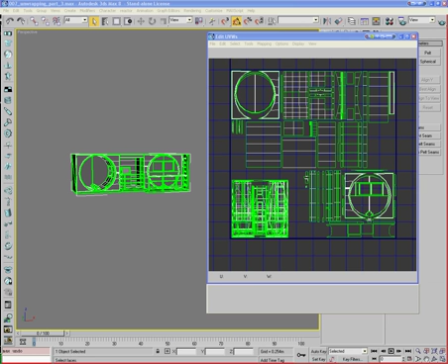Okay, so with luck we're actually on the final straight now, which will be cool. So what we're going to go do now is this ladder, or the ladder area anyway. There's still a couple of rivets on that, so they'll be taking up a bit of unwrapped space, I suspect. So I'm just going to click here and get all these front pieces.

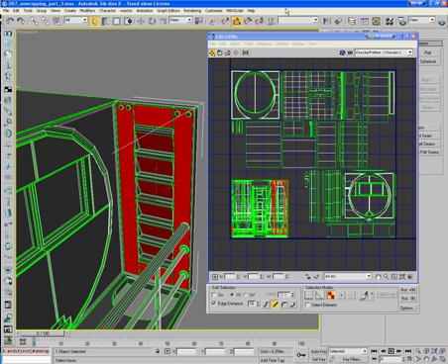There we go. Now move this off and just grow this out. There we go. Now you can see it's all down here, yeah? If I just use the move tool, we've got these pieces and this piece. So these must be the steps here.

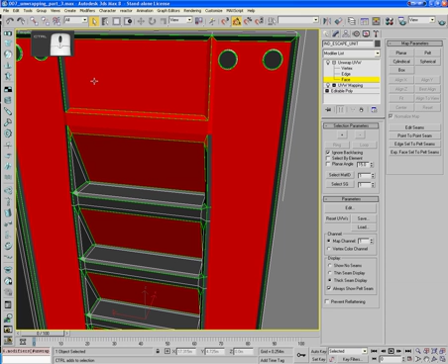So I'm just going to reduce this just a tiny bit. In fact, there we are. Take those off. I'm going to manually add in these parts, because these are the important bits.

I do apologise for me sniffing, making gawking noises and stuff. A bit of a cold at the moment, I think.

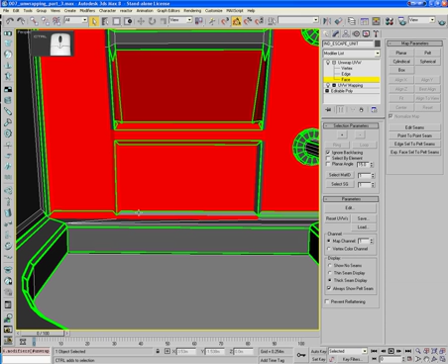Oops. Okay. Just undo those bits. And then get these ones in.

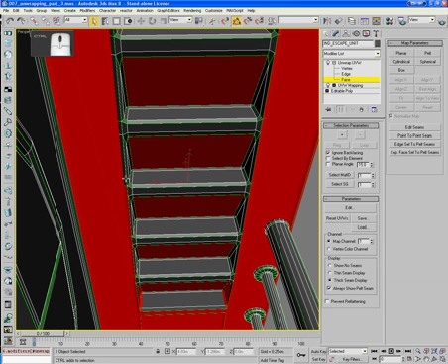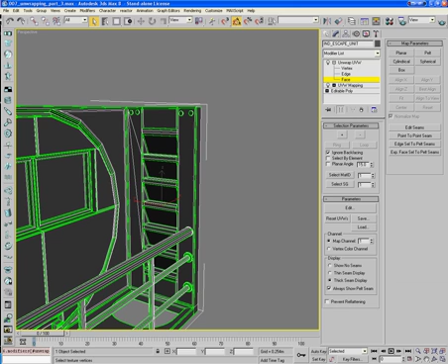Okay, pull back. Now you can see these pieces over here, so I'm going to go Tools, Detach Edge Verts. I'm going to bring this over to here. Now let's have a look at this piece here and see what it is.

Okay, these pieces aren't important, so I'm going to bring these back to the little fold. These bits are very important, my mistake. Let's have a look at them. Spread them out a bit. See what we've got.

Right. These are our steps that go inside it. All just been stacked one on top of the other. And then this is just a side piece that isn't actually that important by comparison.

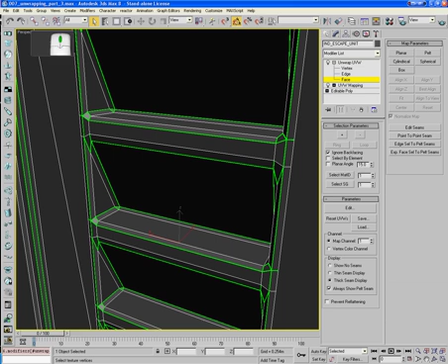Oops, sorry, I do apologise, I'm in a different screen here. These are all stacked on top of each other, yeah, like this. And basically what I've done is I've just pulled them out like that. My apologies for not realising. Pull that over to there. And that.

I'll zoom in a bit so I can actually select it. Getting to the part where we're kind of moving just the fiddly little twiddly bits around there. Oopsie daisy.

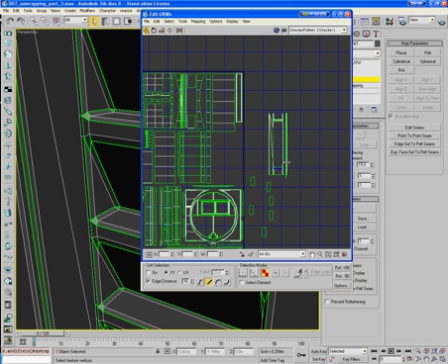Move this out of the way. Back into there. Right, so I'm going to place each of these steps inside this piece here. That should be the top. There we are. Pull back a bit.

So let's find out. This is a one for there. That one goes underneath it. That one goes above it. That one goes above that one. That one goes above that one, and this one goes at the bottom.

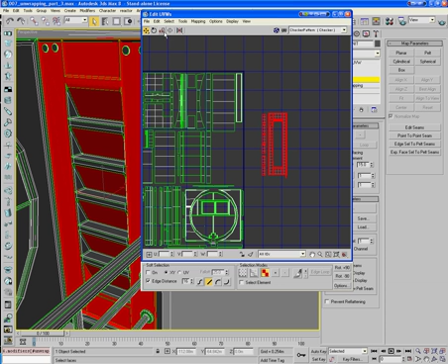Okay, turn these over, and I'm going to reduce them in height and everything else just a tiny bit, and then move them into place. There we are.

Now, this piece here, and here is important for various reasons. So if I go over here and do a tools, detach edge verts, and that will, oh look how nicely that fits just there. There we go.

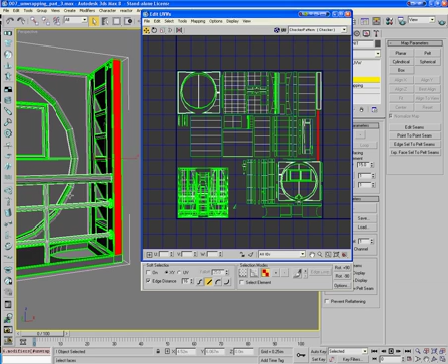Now what else can we do? We've got all these lovely little pipes here. There's not really much I want to do with those, because as I said, I'm going to detach those and do those procedurally anyway.

Quick look around. This side piece can probably do with a little bit more love, to be honest, so I'm just going to move this in here and trying to reduce these a little bit more. Bring that over to there, just so it's nicely tucked out of the way.

I'm going to grab these pieces. Tools, detach, grab, expand a bit. Okay, that's one of the side walls in place.

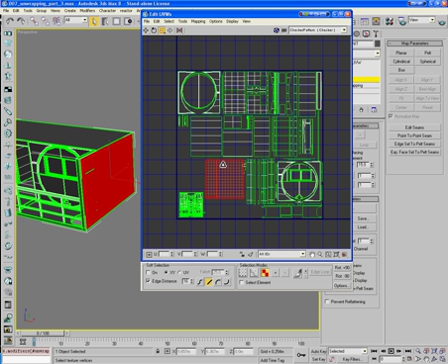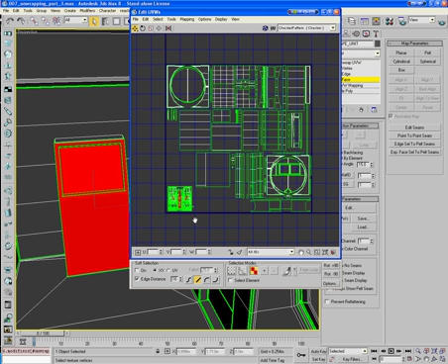Right, now we're left with our little terminal here. So I'm going to take the screen and grow. Take this as well. And I'm pretty sure, yep, there it is. Tools, detach edge verts.

There is our terminal. Not looking as wide as it should be though, so we can fix that. There we go, that's the correct width. It smells fabric conditioner for some reason.

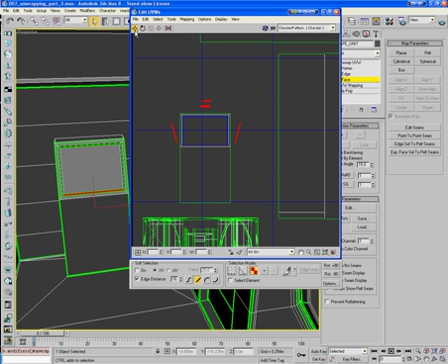I'm going to move these little pieces here down because they mattereth not a fig. There we go. That goes there.

Now, over here, take this piece and this piece, and for double cunningness points, I'm going to take this piece and this piece. Note that I'm holding control. You should have worked that out by now though, so there we go. Grow these out just a bit. There we are.

That goes there. Only got two real main pieces left to go now. And admittedly this has been a very fast unwrap session. You should take your time and you'll do a much nicer job than I do, believe me.

Okay, tools, mapping tools, here we are. Detach edge verts, it's at the top of it.

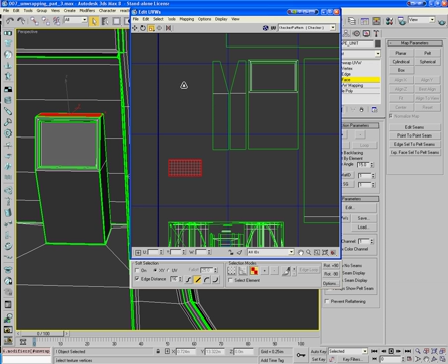Bloody riverdance going around my head for some reason. Sodding Michael sodding Flatley. Oh no, I can move my feet really fast. Look at that, look at it all flail about. Yes, well done Michael, I'm very impressed.

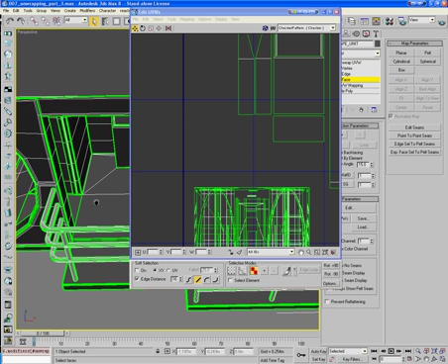Okay, and I think I'm just going to move this over here so I can... where's it? There we go. Move that up to there. I'll click here, here, getting a bit closer. There, I think I've got the other side too. And here.

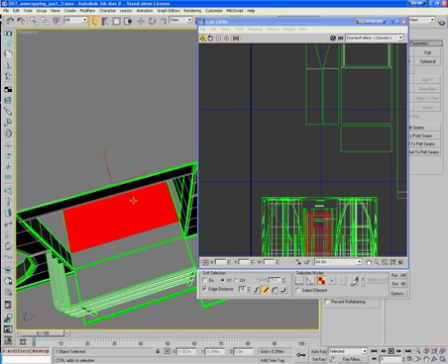And you can see the floor is just there, so tools, detach edge verts, drag it up, there we are. And let's check out our spaces. I think we can fit one in just there, don't we? Yeah, of course we can. Enlarge it a bit more. Don't want them to overlap, that's quite important by the way.

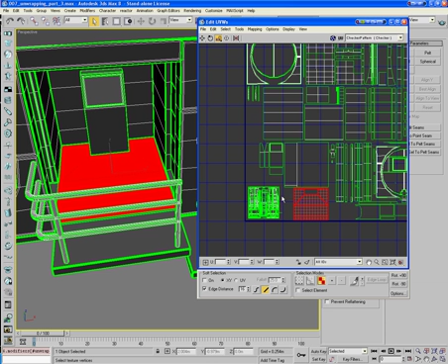There we are. Okay, we now have the plinth. Now, if I just select this part, which is like all the other junk that's left in here, I'm going to select that, turn around, that, and that.

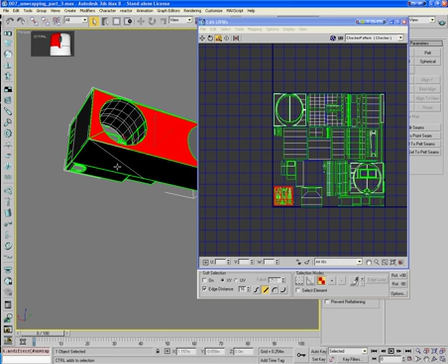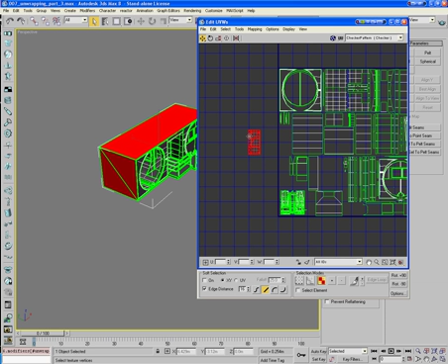Okay, this is our main kind of walls. They're not that important, so just going to detach them and move them somewhere, kind of out the way a bit. Scale them down though, just so that on the off chance we don't stretch any textures with them. Remember, we're not actually seeing this piece, it's behind, it's not important.

Okay, now grab these, this is our leftover nonsense. If we were just to flatten it, and then reduce it in size... oops, a daisy. There we are.

Come down here to where the space is. So I mean, this is all just our leftover bunkum, yeah? The bits that make up the pipes or whatever, and borders and stuff. And you can unwrap these more, you can unwrap them to your heart's content, quite frankly. Just I don't really have time in this tutorial. I've taken quite a long time as it is.

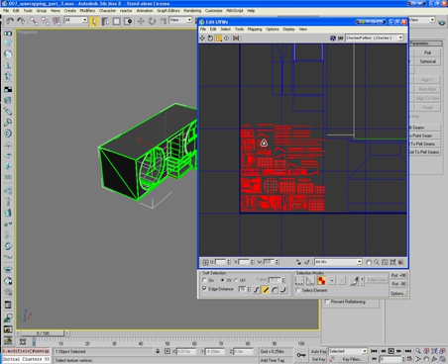Okay. So, open this out now, and I'm going to get this kind of centralised on my screen.

Now, in the good old bad old days of 3ds Max and unwrapping, we had to use Texporter to kind of print out this, or we could use print screen and then take it into Photoshop or MS Paint or GIMP or whatever the hell you're painting in. If you're particularly unlucky, you know, deep paint.

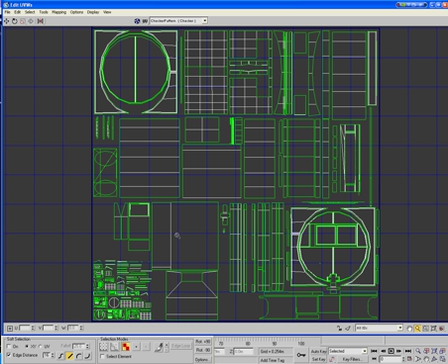We don't have to do that anymore though, because we've got various options. So, let's have a look. Try and remember where the heck it is. Here we are, Tools, the Render UVW template. Fantastically useful, it does what Texporter used to do. So click on it.

And at the minute we're doing 1024 by 1024, which is good. You can do more than that if you want, but try and keep it, you know, paired. So 1024, 1024, or 512, whoops, 512, or whatever. You know, I don't mind. So 1024 by 1024, that's quite a nice big file, and hopefully we should get some detail on this.

If you want to go really mad, then 2048. However, you'll be putting a lot of detail in that one. I think I'll go for 1024. There we go, and if I just click render, here's our rendered map now.

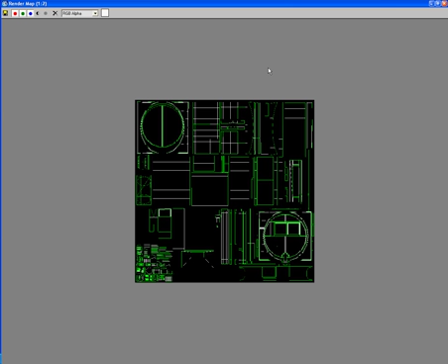Now it looks a bit kind of off, but if you actually zoom in to real size, you can see it's rendered out our UV pretty much perfectly. Now if I click save and save my bitmap now, we're going to have a nice template to work from for dragging it into Photoshop.

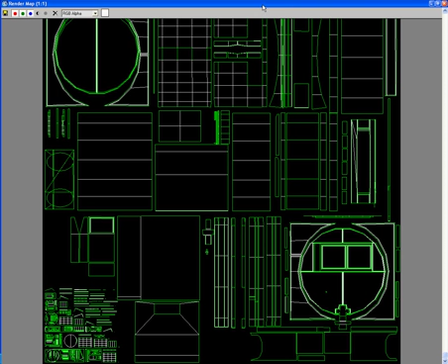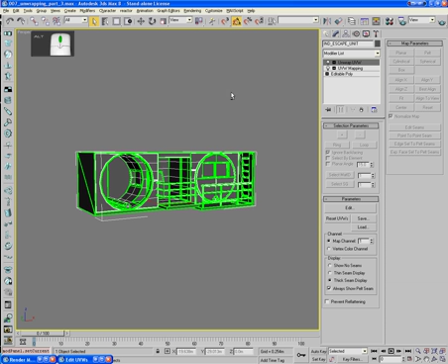So I'm going to minimize that and close that, minimize that, so I've got my two windows down the bottom here and here, yeah? And I can now close my unwrap modifier.

And we've unwrapped, in a very basic way, our environment here. Rendering it, you won't see anything different incidentally. So in the next part, we're going to drag this off into Photoshop and start making some textures, which will also be a long drawn out process. So until then, thanks for watching, and see you in the next part.